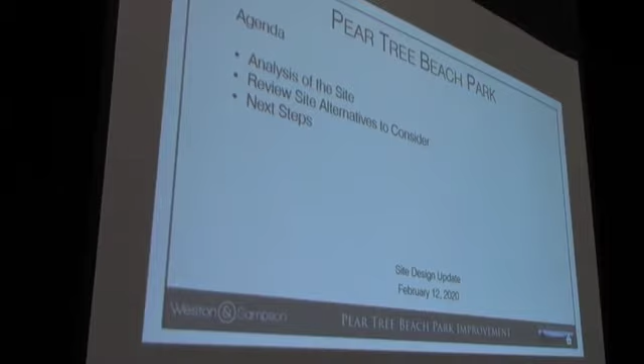Good evening, everyone. Quickly, for tonight's agenda, I'm going to go through the analysis of the site. I will give Craig and Devin a chance to introduce themselves and give a little background on who they are. We'll review some technical data tonight about the grades of the parking area, looking at some actual flooding events and projections. I'm going to review the CAM report outline, what that entails, and go through what the next steps for the committee need to decide as the meetings progress. But first, I want to reiterate some of the priorities and key considerations we've been working through in this whole process, which come out of the RFP that was the basis for this project.

The first, and these are in no particular order, is to protect views and maintain the natural qualities of the beach park area. Second, provide sidewalks and pedestrian access through the beach park area. Third, improve beach resiliency and reduce wind and water erosion by increasing natural shoreline areas.

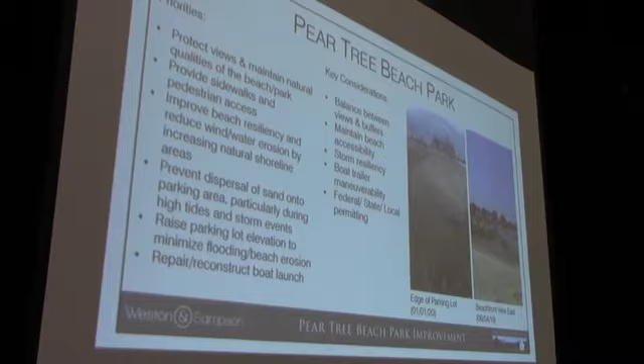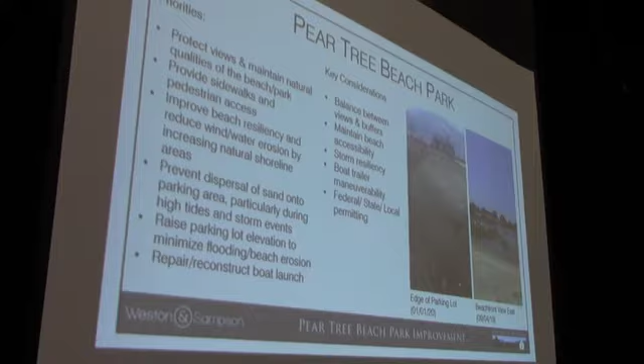As you know, there's a lot of sand that has been built up, specifically during storm events, that has eroded or washed over into the parking area. This next goal is to prevent the dispersal of sand onto the parking area, particularly during high tides and storm events. Next, to raise the parking lot elevation to minimize flooding and beach erosion. And third, to repair and reconstruct the boat launch.

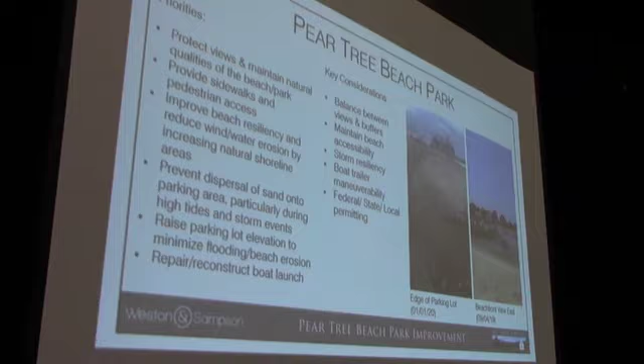So these are really the basis for a lot of the site work we're talking about tonight. Neil's been talking about the building so far, so we're going to pause on that component of the project. But everything we'll be showing you actually works very seamlessly together. The grades we'll be talking about, everything Neil's been working on, works with everything you're seeing tonight. So it all works as one complete puzzle piece together.

Key considerations to accomplish these priorities: the first is the balance between views and buffers. We've talked about this a lot in the past, just balancing that need to buffer the resource areas while also preserving the views that are into and out of the park space.

We want to maintain beach accessibility, so when looking at where the parking area is and how to get to the beach areas, we maintain that access and connectivity between the beach area, the parking lot, and the concession building. We want resilient plans, so when storms come or projected sea level rise happens, we have a plan that's going to last for years to come. Not that we've addressed it this year, and then next year, with whatever event happens, you're in the same position as this year. So really looking forward, we're projecting out and having a plan that's really going to be resilient for years to come.

Related to the boat launch, we're looking at trailer maneuverability, so access around the parking area, making sure we are maintaining parking as well as circulation patterns so that users are comfortable using this space and it is a functioning parking lot. And finally, getting through permitting - state, local, and federal permitting process - abiding by all rules and regulations, making sure we're going through proper channels for state and local permitting. That's just an underlying key consideration in everything we're talking about - we have that requirement we're going to have to follow through with, and that's in the best interest of the town.

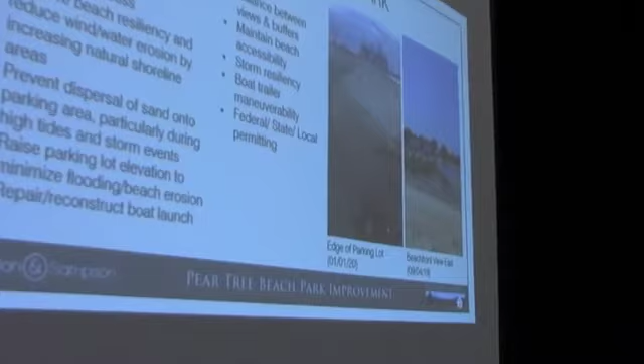Really quickly on the pictures on the right-hand side, just for perspective - sorry it's a little grainy - the view on the right, many can see, this is looking out more or less from the concession building towards the harbor area. And although it doesn't look nice, this is actually a wetland area. You can see when the water's at low tide, just how different it is in that low water event. And the picture here, I think Craig took maybe just after the first of the year. This is a similar view - the curb line is actually right here, and the water had washed up into the parking lot.

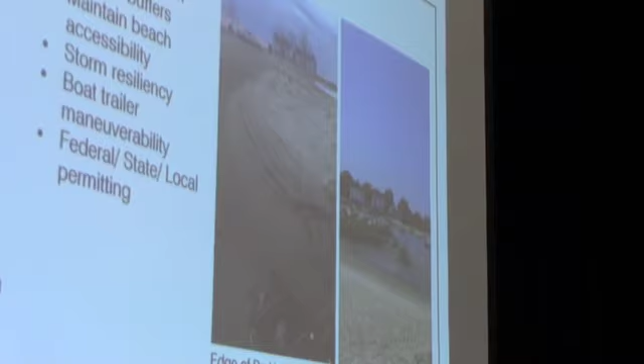So although you can't see the asphalt, it's under there. But those are two kind of balancing points - we're taking this low water and high water event, and a lot of discussion we'll have tonight will be on those two components. So really quickly, I want to let Craig and Devin give you a little introduction to who they are, besides what Neil said.

My name? That's your name? Yeah, you know me, hello.

My name is Craig Flaherty. I'm a professional engineer licensed in the state of Connecticut. I am the president and senior engineer of Redniss & Mead, a land use consulting company based in Stamford, providing land surveying, site civil engineering, and zoning consulting services. My background includes 25 years of providing land use consulting services, site design, and site engineering with a specific emphasis on stormwater and floodplain management, predominantly in Fairfield County. I've worked a lot in town - for Noroton Yacht Club, Noroton Presbyterian Church, the Anderson Memorial Trust, Woodway Country Club, and also on one of the two Grove Heights projects - for familiarity with local regulations as well.

I have served on a number of boards and committees in the town of Darien. Two past ones were the Environmental Protection Commission, which in the town of Darien is the Conservation Commission, the Wetlands Agency, and the Flood Erosion Control Board. I served on a flood mitigation strategy committee that reported directly to the selectmen, which dealt at the time mostly with riverine flooding after some of the floods the town experienced in 2007 and 2008.

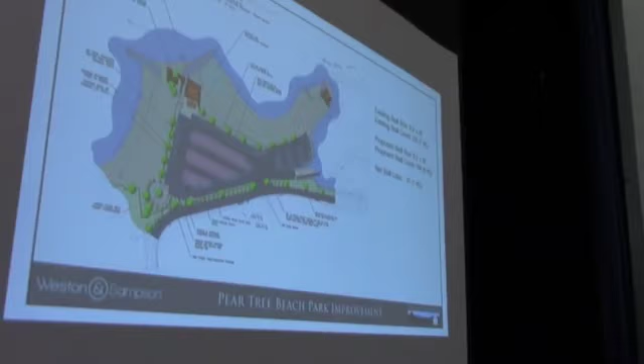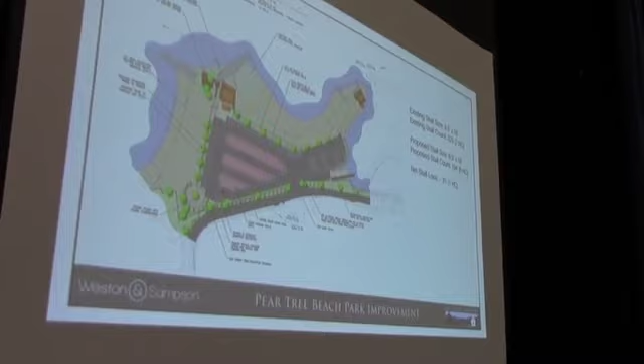I think this might have been back in September. Actually, time has kind of flown. We've gone through many iterations, but the latest, just very quickly, was looking at the parking lot more or less as it stands today, replacing the existing boat launch. We had a previous discussion about berms. At that time, the berms were set aside for a later date. So there was a landscape patch, or landscape areas, buffering between the parking lot and the beach itself with trees.

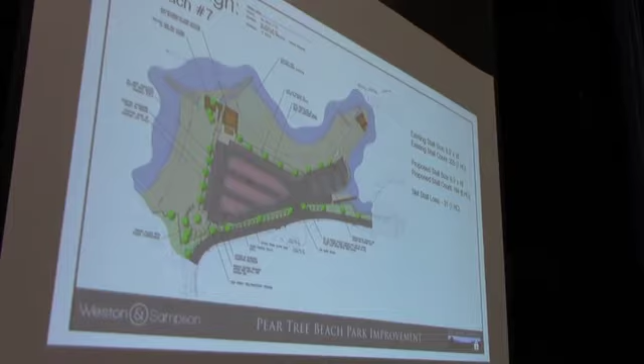The concession building, as I mentioned, has been evolving and progressing. There's a seating area down in the lower left-hand corner, an outdoor plaza, picnic table area with a mixture of different surfaces. Overall, we're looking at basically the parking lot as it is, but with a reduction in parking spaces. We noted earlier this line is the existing edge of pavement, and we had pulled that edge in for the back of these stalls to give additional beach space.

So with this plan, this is really the template that we're going to move through a couple slides to get fairly technical into the hydrology of the site itself.

Just to reiterate some discussions we've had in the past, the features that go into the landscape: one of the major limits is the mean high water limit at 3.4, which wraps around the entire parcel. The coastal jurisdiction limit, fairly hard to see but maybe better on your mapping, is at elevation 5.5, and it cuts into the parcel itself right here. That is important because that is a limit that the state has jurisdiction over. So if you imagine this whole area here, that's where they do have a say, as in DEEP has a say, on what can go into that area.

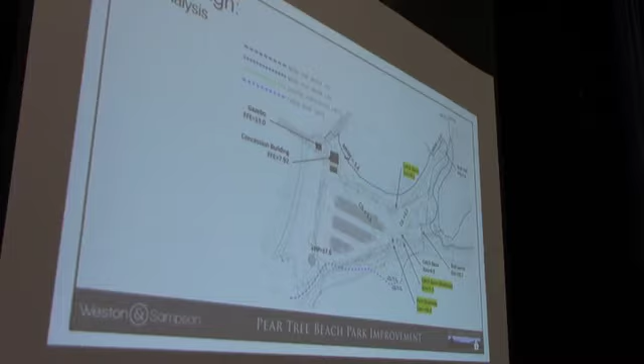The next line I want to point out has a couple of elevations, because you're going to see these points come up over and over. There is a catch basin here right at the edge of the parking lot. Make a mental note: that's elevation 4.2. So mean high water is 3.4, coastal jurisdiction is 5.5, and this is in the middle. Out here on the road, it may seem insignificant right now, but you'll see why it's important. The catch basin at the road is elevation 5.5, and the park drive at the driveway is about 5.9. I say that because these grades pretty much are the controlling grades that drive how this parcel, the park area, the parking lot area, really can be raised within reason or modified within reason.

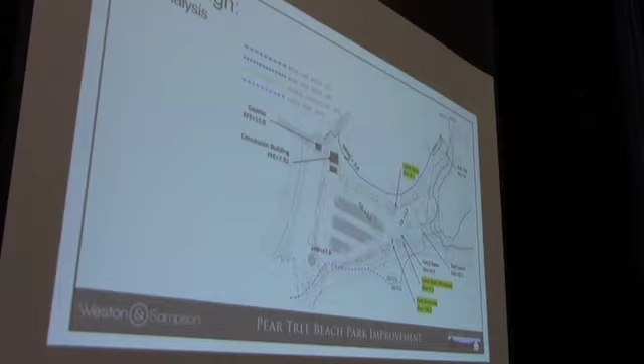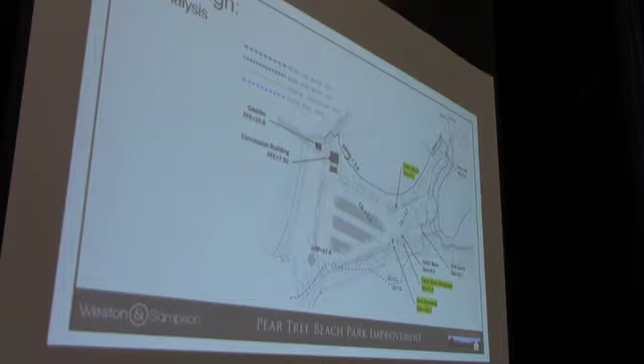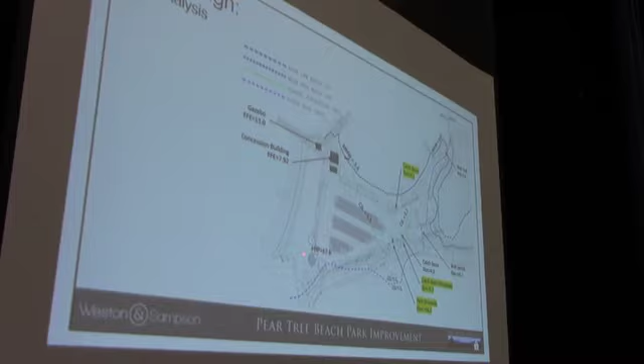And as we go through, you'll see these points still come up, so I kept them highlighted because they're important. Also note that the concession building is 7.92 and the boat club is at 7.9 - you'll see those elevations come up again for perspective. And finally, looking at the high point in this corner, about 7.6, that drops down to 4.2. So about 3 feet of elevation difference across the parking lot, but relatively it's pretty flat. You'll see in a minute how those grades influence our conversation.

May I ask a question? You're just on that slide. Can you clarify why you have FFE versus rim versus elevation as your levels?

Sure, sorry for the acronym. FFE is finished floor elevation - basically the surface of the walking surface of the buildings. Rim is actually the elevation at the rim of the catch basin, so the metal, the iron that sits in the storm drain, that is at the elevation of 4.2 or 5.9.

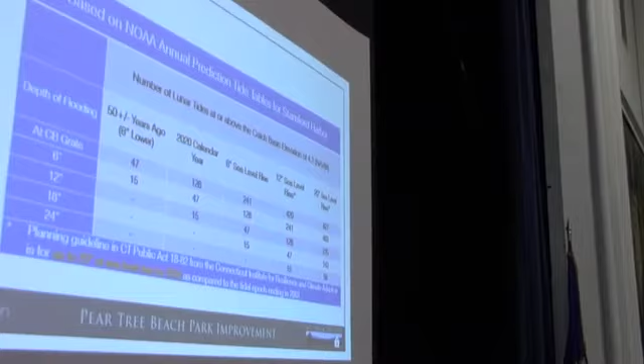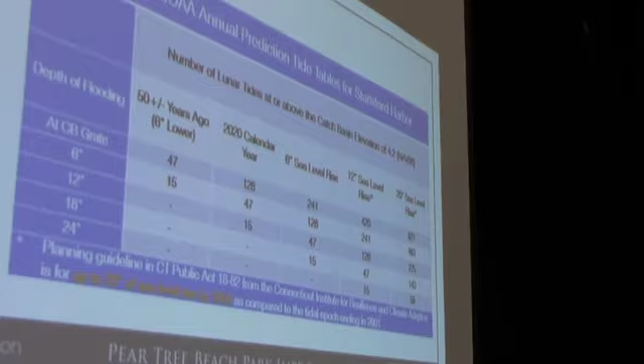Thank you. So as we're starting looking at the site and some data, Craig's going to talk a little bit about the prediction models - these are some of the values that are important as we look at the site. I'm also going to hand out a memo summarizing some of the things I might go over in my presentation tonight.

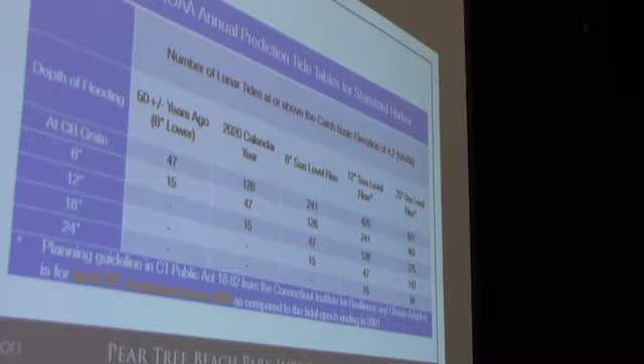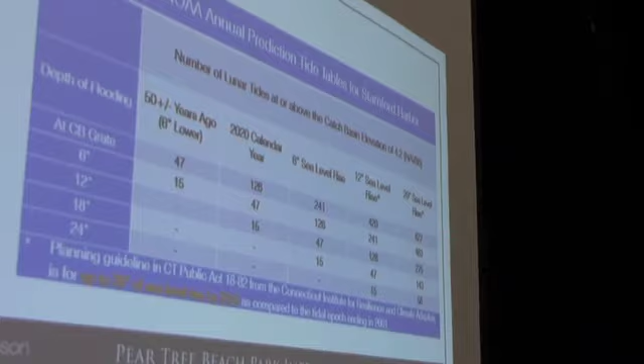First, a little bit about the numbers Dan was using. All those numbers are expressed in feet, above a particular datum, the 0 point, called the NAVD88 datum. It's accepted by FEMA and used in all their coastal and riverine floodplains. It's also accepted by DEEP in the state of Connecticut for site plan review applications in coastal or riverine flood areas. More importantly, it's the datum that your survey was based on, so as I talk about numbers tonight, they're all based on that same datum as your existing condition survey, and it has the regulatory framework.

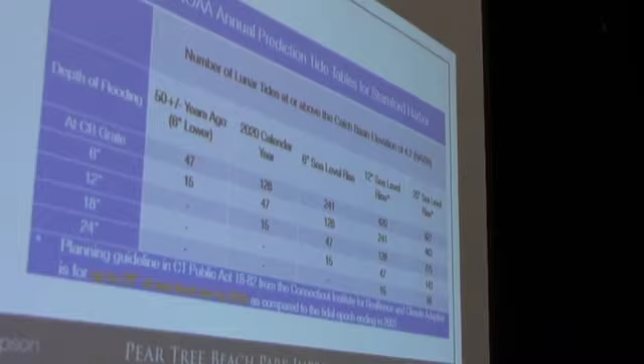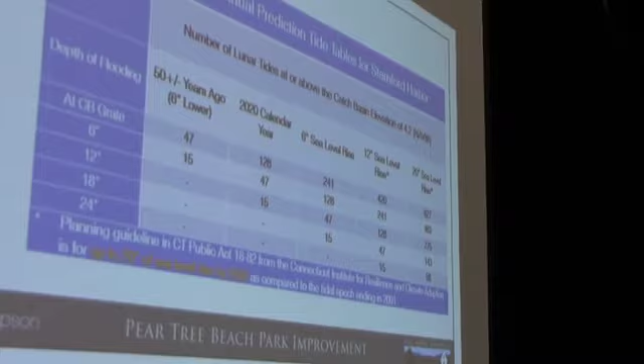This datum is different if you're a sailor or look at tide charts - that datum is usually based on mean low water, and could be several feet different. So when we say mean high water is 4.3 based on your survey, on a tide chart you pull off the internet it might say 7.3. So it's not the same thing - I just want to make sure that's clear.

The other thing to point out before I get into the numbers - I want to spend time making sure you understand the message I'm trying to convey - is in this memo I just passed out, the parking lot at Pear Tree Point Beach is low-lying. You know that, and that low-lying nature makes it susceptible to inundation during just a normal predicted lunar tide cycle. It makes it susceptible to inundation in any storm surges or weather events, and those conditions will be exacerbated moving forward based on predicted sea level rise.

Just as a frame of reference, the parking lot at Weed Beach is around elevation 8, plus or minus, based on the same datum. So when this catch basin is at 4.2 at the low point of the parking lot, that's 4 feet lower than the parking lot at Weed Beach. Most of this Pear Tree Point parking lot is below elevation 6, although it has high points near the picnic area, around or above 7, near the boat club at or around 7, and near the concession stand at around 7. It all rolls down to that lowest catch basin, so most of the parking lot's really below 6 - 2 to 4 feet below the Weed Beach parking lot, which is why this parking lot floods very frequently when Weed Beach really only floods in coastal storm events.

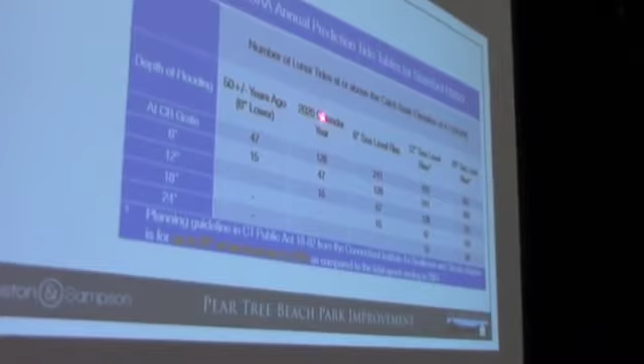So it's much more frequent than you might imagine, because it happens at night, it happens in winter when you're not there, but it's happening frequently. And where you pick up that number on this chart is here. All this data I'm presenting is based on NOAA annual tide prediction tables for Stamford Harbor.

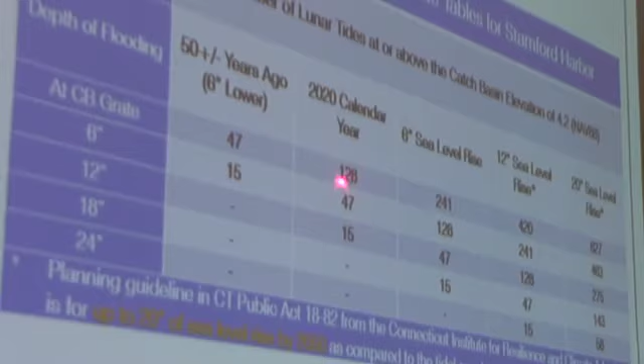This is predictions for the 2020 calendar year, so that's the column we're focused on right now. I'll get into the other columns as we move forward. The top row shows how many times in 2020 the elevation of normal tide—not storm surge, not sea level rise—is going to be at or above that catch basin grate.

And what we've done in this column on the left is say, okay, how much water is going to be in the parking lot as water rises and gets higher in some of the higher tides. So at the catch basin grate, we have 6 inches of ponding in the parking lot by the catch basin, 12 inches of ponding, et cetera.

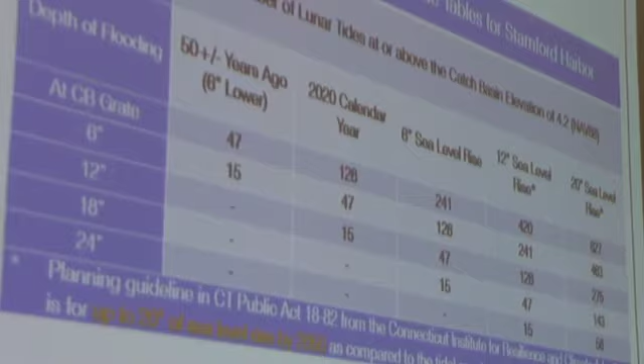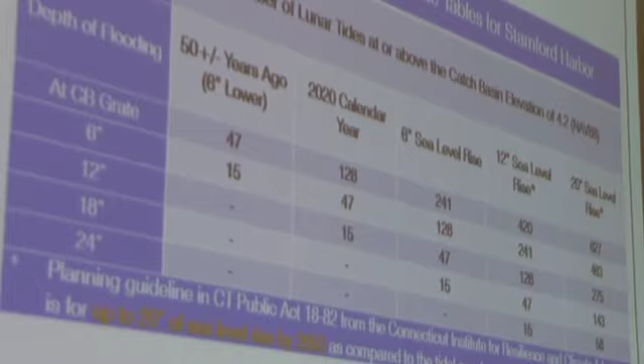So coming back to 2020, this coming year, something like 4 times a month there'll be at least 6 inches of water surrounding that catch basin, which starts to expand out into the parking lot. We're going to show you a graph of that. And something like once a month, there'll be at least 12 inches of water at that catch basin, pooling out even farther.

And this has nothing to do with storms. This is a beautiful sunny day. This is just normal predicted tides.

So before I go, I think the other thing to note is you remember Dan saying the coastal jurisdiction line was about elevation 5.5. When the DEEP sets the coastal jurisdiction line, it's actually a different elevation for different communities up and down Long Island Sound. They're replacing some old regulatory language, and they were basically trying to target the highest single annual predicted tide for any given year.

Again, not storm surge, not sea level rise, just predicted tide cycle based on the moon and the sun. That's at elevation 5.5, and that's what we found in our data too—that happens zero, one, or twice a year when you're looking at the predicted tides. So they did a good job picking that elevation.

The other thing that's unique about Long Island Sound, and folks that spend time out in the Sound understand, is the geometry of the Sound affects tides along the Sound. So high tides to the east are lower than they are in Darien, and high tides to the west are higher than they are in Darien.

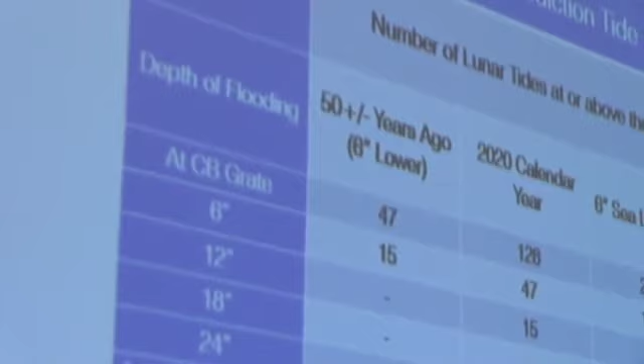We've seen about 6 inches of sea level rise over about 50 years. When I actually checked the tide gauge data from 1974 versus the tide gauge data for 2019, for the 45-year period, it was 7 inches. I used 6 inches for ease of math.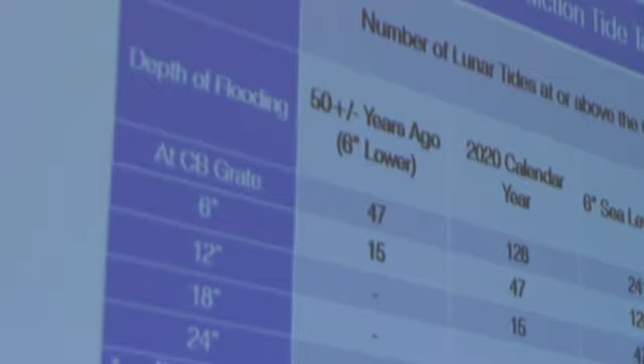But you can see that 50 years ago, which happened to be when the original bathhouse, the one that's currently there, was built, that 6-inch flood happened once a month. And now that 6-inch flood is happening 4 times a month. A 12-inch flood didn't happen, based on, again, not weather-related incidences, but just tides.

And now it's happening. So if you've ever looked at the graph of a tide cycle, it's a sine curve, and the top of the sine curve is very flat. So if you adjust the top of that sine curve, you actually experience a lot more frequent inundation and a lot longer inundation than just a linear analysis might otherwise suggest.

So we now take that information and start moving forward. What happens if we get another 6 inches of sea level rise from where we are today? Well, that 6-inch flood that 50 years ago was happening once a month, and now is happening 4 times a month, is going to happen 10 times a month.

That 12-inch flood that didn't used to happen, and is now happening once a month, is going to happen 4 times a month, et cetera, et cetera. So I think the point I want you to take away, and we can talk about the other numbers too, is that with very little sea level rise, the nuisance that might be tolerable today is going to turn into what may be an intolerable nuisance.

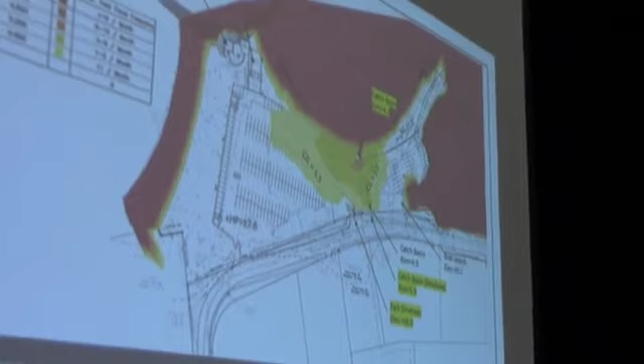So we tried to take the information from the chart and demonstrate it in plan view. The exhibit you're looking at is a study of existing conditions, existing survey, existing ground elevations, with this year's 2020 tide prediction and no storm surge, no sea level rise. The yellow area, the lightest yellow, is that plus or minus once-a-month event. The orange or red area centered around the catch basin is that 3 or 4 times a month event. As the water gets deeper, it spreads out in the parking lot, and you can see how much of the parking lot is being impacted by these events.

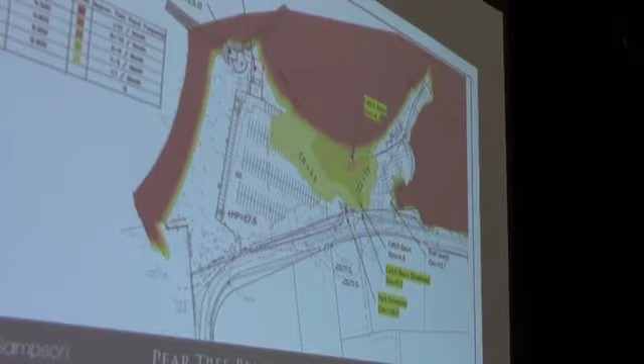So now we're going to take this and project it out. This looks at the same scenario, existing conditions, but with 12 inches of sea level rise. How does that change? You saw the numbers on frequency, well this is how it changes how much of the site gets covered with water. That red area is kind of hard to see with those blurry numbers, but I think that's the area that's something like 18 inches deep in the highest floods.

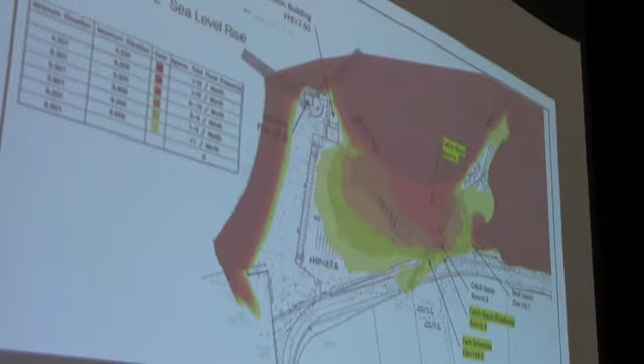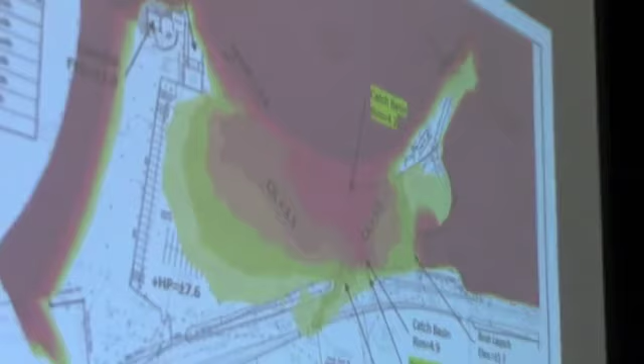Going out from there, let's go back to the chart to make sure I've got this right. This is the extent of flooding when water gets about 12 inches deep, and I think this is the extent of flooding when water gets about 18 inches deep.

Along with the frequencies noted in that table from the slide before, this is what a do-nothing scenario will get us at some point in the future as sea level rises. It significantly, in my opinion, affects the usability of the asset.

Moving on from there, you'll see that at this point with the 12-inch sea level rise, there's actually inundation in the road. As I noted earlier, this is about elevation 6.0. So in this scenario, the parking lot is flooded, but also part of the road would receive some of that water because it's above 5.9, which would be a source, and it's also coming from the lower area of the parking lot. Just make note of seeing this little finger here, you'll see that continue.

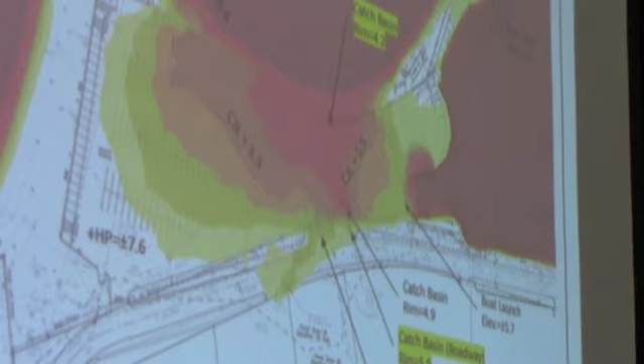The extent is that once a year event, right? The single highest predicted tide, that's the farthest out yellow. It's going to happen once based on predicted tides. But as you get closer to that catch basin, those are the events that are going to happen with much greater frequency.

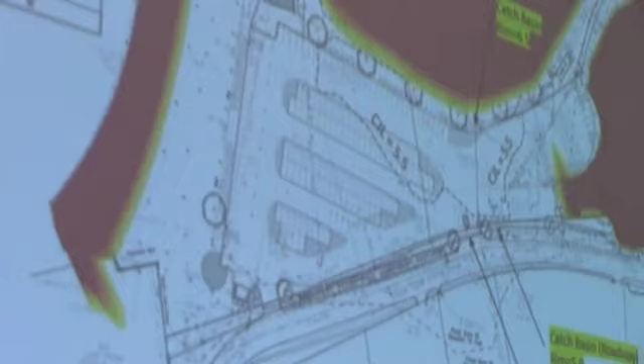So in concept, the grading plans that Weston and Sampson is looking at and we're reviewing are going to try to eliminate any flooding in the parking lot and provide more elevated beach along West Beach that's more usable more frequently.

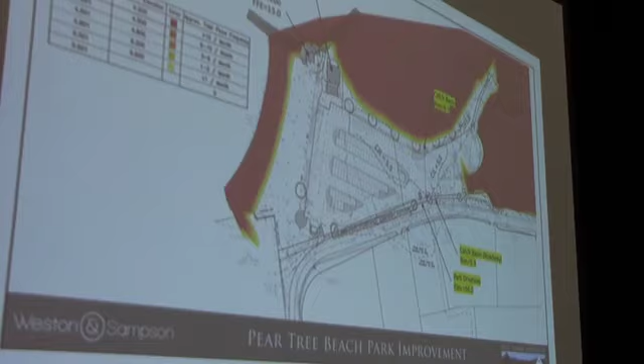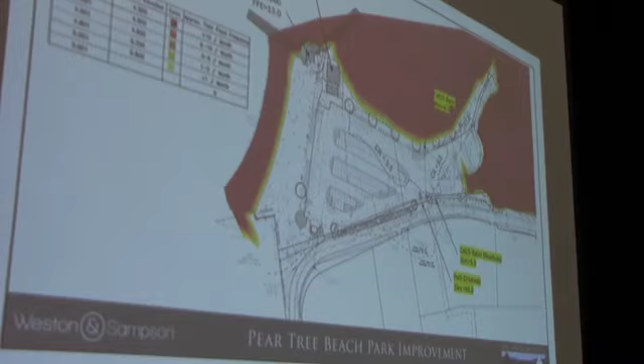And so this is that baseline 2020 year with zero sea level rise. After we make improvements, what are you going to get? You're going to get more width on West Beach, and you're going to get a dry parking lot in these predicted timelines. In this case, the improvements are raising the elevation of the parking lot where we're talking about.

So that rim earlier was at a 4.2. By raising it to 6.5, you see that there's no source of water coming out of that point anymore because it's now above these elevations we're talking about. It creates a higher and drier area as a result.

And then to stress test this: if you go through the process of spending the money necessary and doing the permitting necessary to accomplish that, what happens with 12 inches of sea level rise?

So it's still the infrequent once-a-year events in the lightest yellow versus once-a-month events in the slightly more orange, happening, but not at the same frequency as they do.

And to note in this scenario here, there is some flooding in the parking area, as obvious. I pointed that finger here across the road. This is because the rim of the catch basin in the road is a source for that flooding. So at this point, you would not be able to get to the park because the road would have flooding. The parking lot would have that 1-in-a-month occurrence of flooding there.

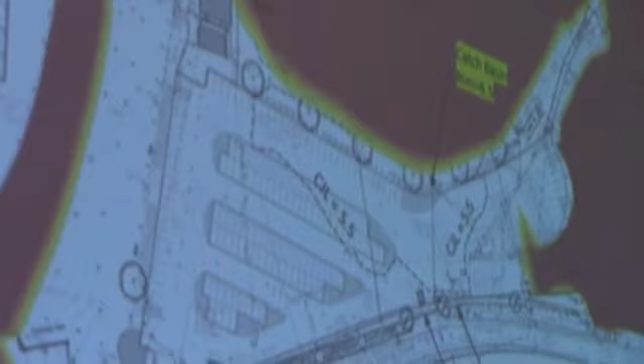But you're adding 18 feet of depth to the beach. That's correct, adding 18 feet of additional beach area. So you're swapping beach for parking lot. Correct.

Or the other way around. Now, I recall an early meeting, I'm just asking these questions, with Jeremy, and he said that raising the parking lot elevation was really difficult to get approved by DEEP. And he also indicated that when you raise the elevation of a parking lot in one area, you may have consequences from adjacent land. I'm just asking these questions.

So we're going to cover a little about what these scenarios mean from a permitting standpoint, an approval standpoint, and Devin can probably speak a little about too, the area of this parking lot relative to Greater Long Island Sound.

It's typically reviewed as a small droplet in the entire body of water, but I'll let him speak to that. We will cover a little about the permitting processes. Each of these scenarios has a different path we would have to head down, depending on the decision of the committee.

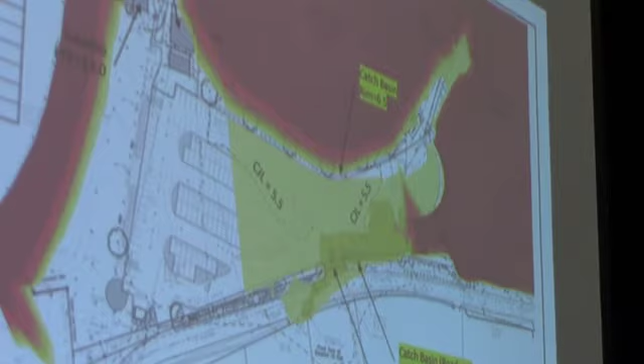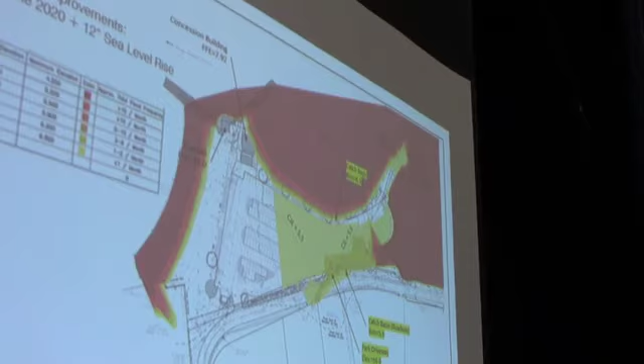So we covered a little about 12-inch sea level rise of a proposed improvement condition. Just to note, you can see here where it's dry. From a modeling standpoint, that would be top of curb, basically water never exceeds the 7.0 contour elevation, which is why you're seeing this sliver of white of never having water exceed over that curb line. Again, you don't have any grading plans necessarily done at this point. We're just trying to show the rapid modeling of how these scenarios relate to existing and potentially proposed conditions of this park area.

So the water's coming out of the catch basin? What's coming down here? It's coming out of the catch basin. Yes, because we're not intending on changing the road. Or up the boat ramp. Yeah, or coming up there.

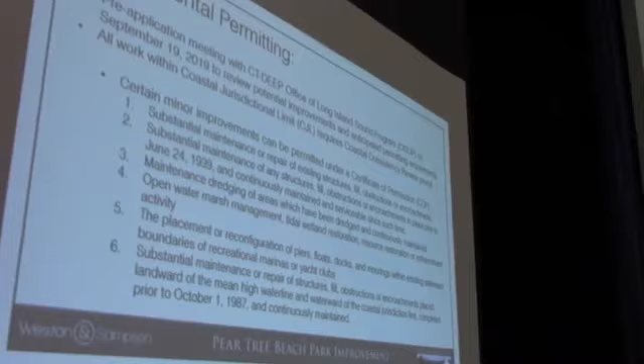So the permitting idea, Martha, you jumped ahead a little bit, but I mentioned earlier that we do have to go through the permitting process. Last year, we met with DEEP to have a pre-application meeting to basically review at that time all the improvements we're proposing within this project. We went down the list one by one of the potential permit pathway.

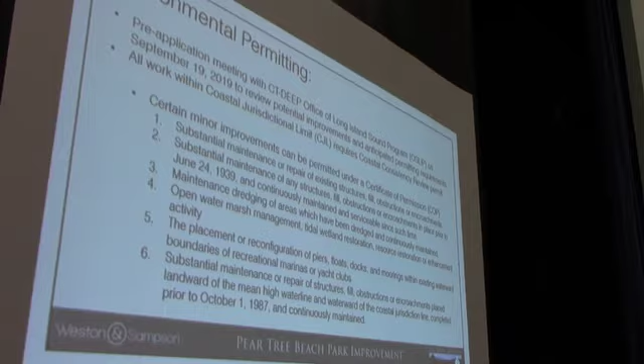And I noted earlier that the coastal jurisdiction limit is in their purview. We would go through planning zoning for proper review as well, and they actually need to defer some to the state for reviews. That's pending the planning zoning department.

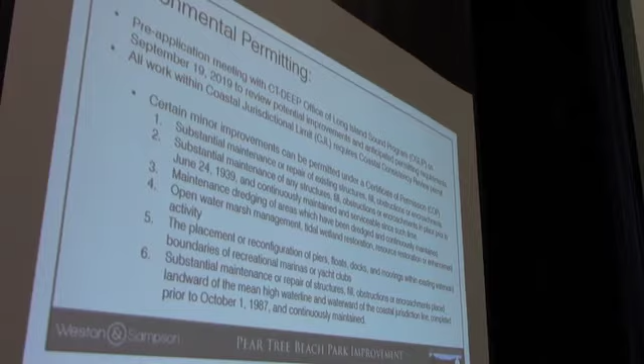But certain improvements would fall under the certificate of permission, and I covered this in one of our previous meetings. I wanted to frame that the certificate of permission really is a permit that's issued for minor improvements. You can see here the list 1 through 6, and this is a summary of their entire list. But you can see there's a thread that's continuous: substantial maintenance or repair of existing structures, or fill, obstructions or encroachments.

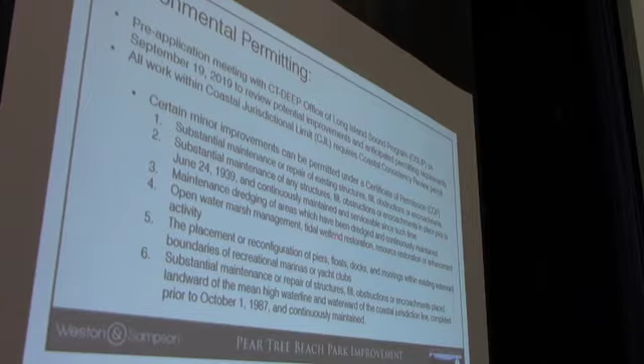Substantial maintenance of any structures in place prior to 1939. Maintenance of dredging, open water marsh management, tidal restoration, resource restoration, enhancement activities. Placement or reconfiguration of piers, floats, docks, moorings. Substantial maintenance or repair of structures.

So there was an idea that the COP is more from a review for minor improvements, more on the realm of a maintenance standpoint. So if we do exceed, through the state's eyes, that our improvements are beyond these, it's going to trip into an individual permit. It's beyond the COP kind of framework for the intent of that permit.

So we'll get here in a minute about how what we've shown you so far fits into those different scenarios. But most improvements proposed within this project do fall within a COP. For example, the dredging would be a COP. Working with building elevations and having improvements within the coastal jurisdiction limit, FEMA requirements, would be a COP.

The wetland restoration would be a COP. So really the item currently that would not fall within COP would be how much fill, that you were alluding to earlier, would be allowed within the parking area, which would prompt the need for an individual permit for those improvements.

Parallel to all this, we've been working on the coastal area management report. This is a requirement of the zoning regulations and the Coastal Area Management Act. This document, as you see on the screen in this quick outline, basically introduces the project and talks a little about the background of what has happened to the site prior to now.

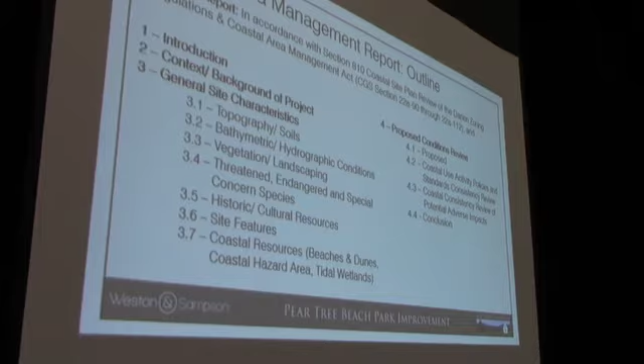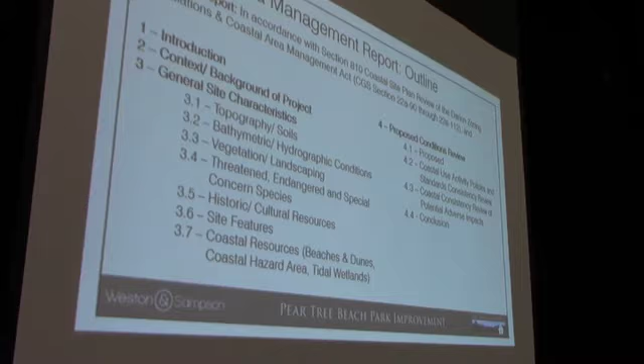It goes into general site characteristics, more from a scientific perspective of all these features: the topography, the bathymetric, hydrologic, and hydrographic conditions, vegetation, landscaping, threatened and endangered species or species of special concern, historic cultural resources, site features, and other coastal resources, whether beaches, dunes, coastal hazard area, and tidal wetlands. These are basically what's in the state statute for the policy we need to comply with.

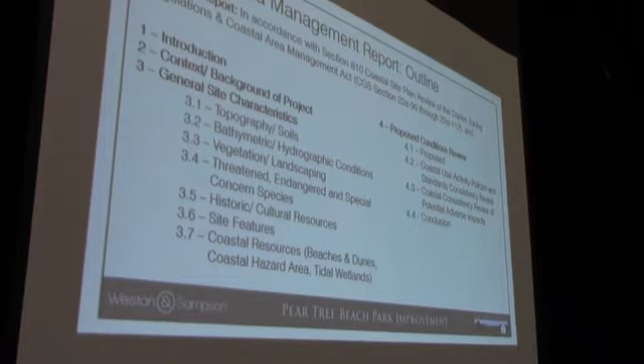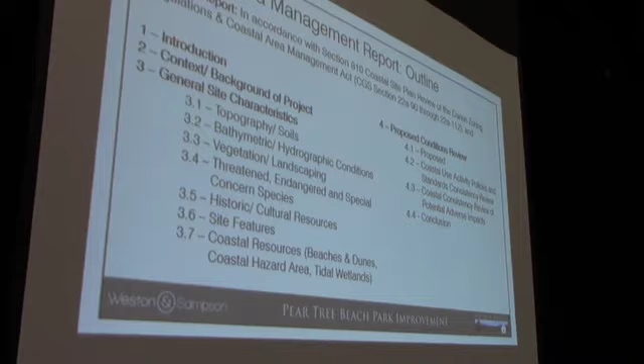So we review all these resources together, and then compare them to what the proposed conditions are. The section on the right is the piece that's not complete, that we're working on, because that all comes out of our conversation here of what the proposed improvements are that will go into this report. Once this is complete, this is part of the package that goes to plan zoning for their approval and review.

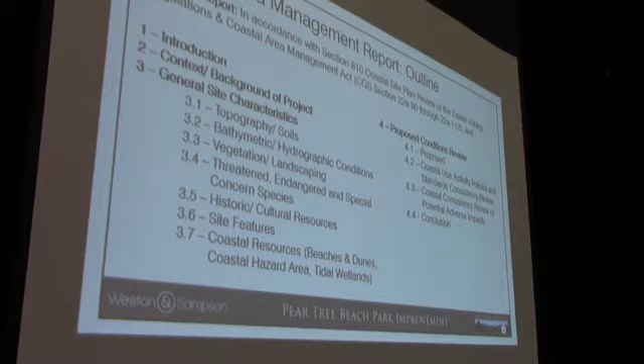And they may push it to have a parallel review, but that's pretty much up to Planning and Zoning's decision. The proposed conditions section will go through every improvement we're making and compare it to the policies, whether it's consistent or not with the policy at the state level, which is within the Coastal Area Management Act.

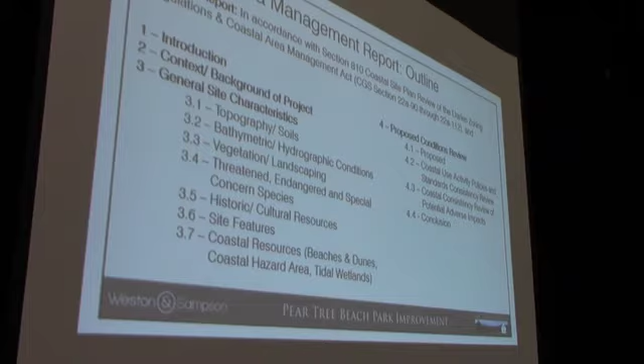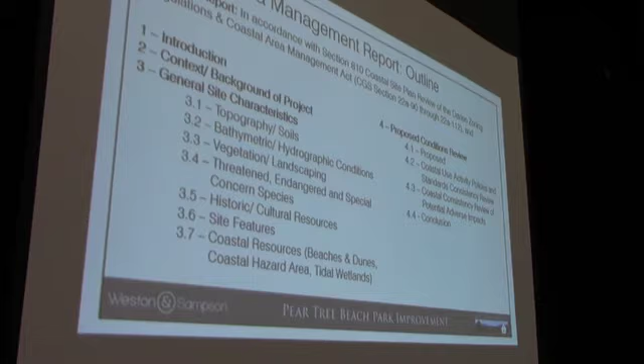Is there any potential adverse impact to any improvements we're making within the site? So we compare every single improvement proposed within the project area to the policies, and does it have adverse impacts? If so, how are we mitigating those, how are we improving the site to relieve them? Or are there no adverse impacts at all, and the project is within compliance with policies and regulations?

So that's what's happening next. Once we decide where the overall site is headed, we then work on chapter 4. There's a lot to take in, but we try to digest it down to roughly four alternatives that we want you all to think about as we move forward.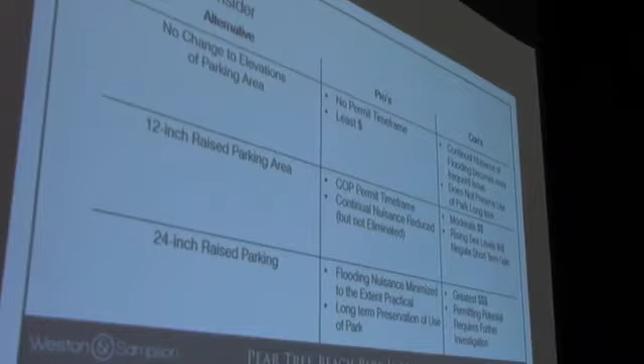The first alternative is no change to the elevation of the parking area. The benefit is there isn't a long permitting timeline. Any improvements without making changes would fall under a COP, about a 90-day review, so that's a streamlined approval because we're basically in compliance. It's the least investment into the parking area.

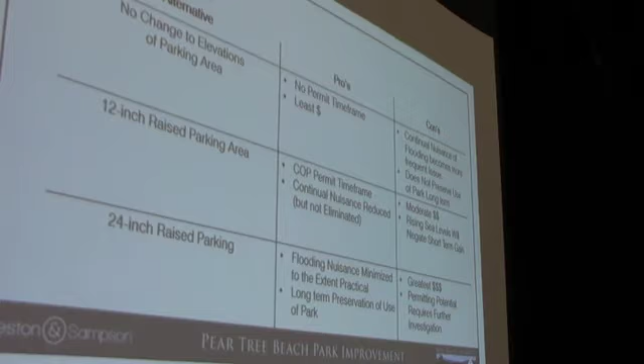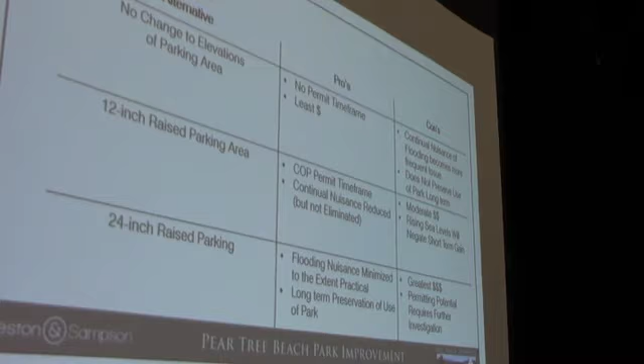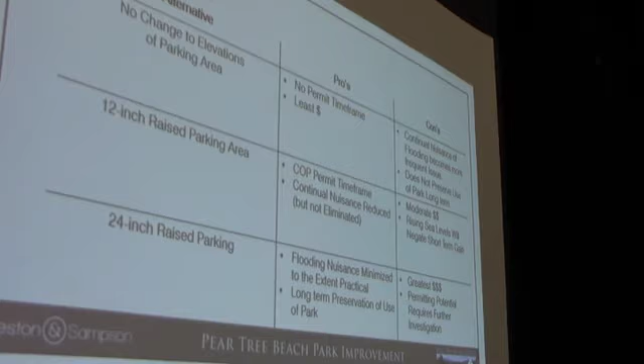But the negatives, as you saw from the imagery, are that the nuisance around the catch basin is now more frequent and more intense, with deeper water ponding. It's not just nuisance anymore, it's going to be a bathtub in the parking lot anytime there's rain. This does not preserve the long-term use of the parking area or the park itself—we'd have a water body within the parking area, which isn't the original intent. So we're not really preserving anything through this alternative.

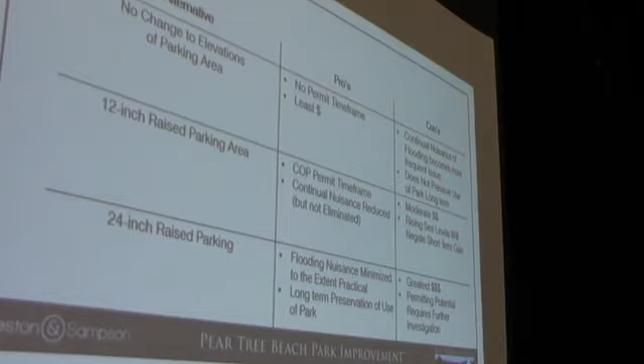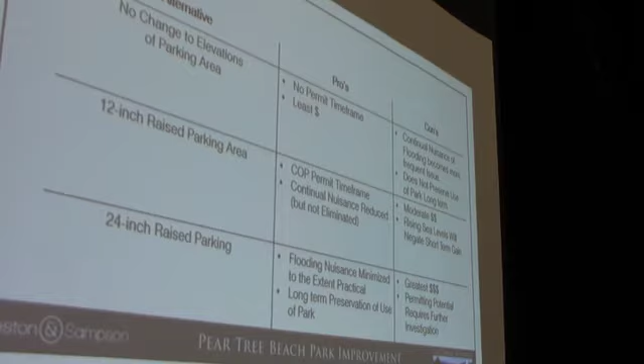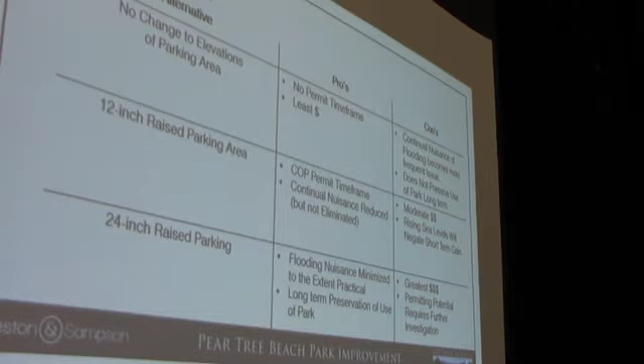The next scenario is raising the parking area 12 inches. That threshold is really an unwritten rule by DEEP as to what falls within COP versus what doesn't. If we raise the parking area 12 inches, it would fall within the COP permit timeline of about 90 days. The continual nuisance is reduced, but not removed—it's just reduced in terms of frequency and depth of inundation. The negative is that there's a moderate cost associated with this.

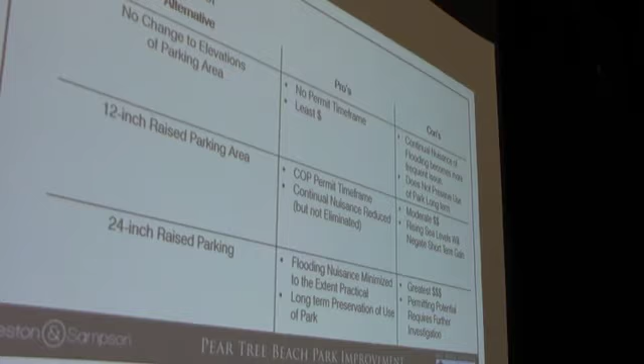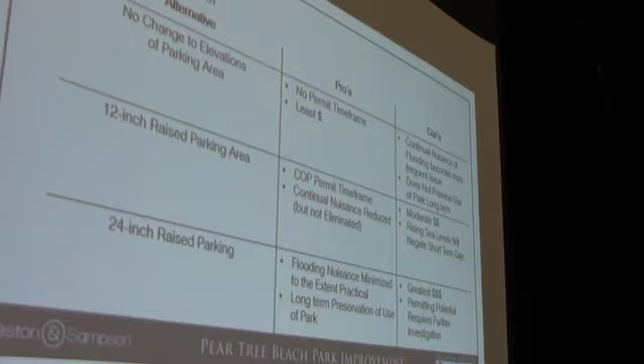There is going to be some investment—more than no change, but less than the next option I'll show you. As sea levels rise, or tides change, the short-term gain may not be such a long-term solution. This scenario may keep things high and dry for a couple of years, but in time it may see more inundation as tide and sea level rise continue.

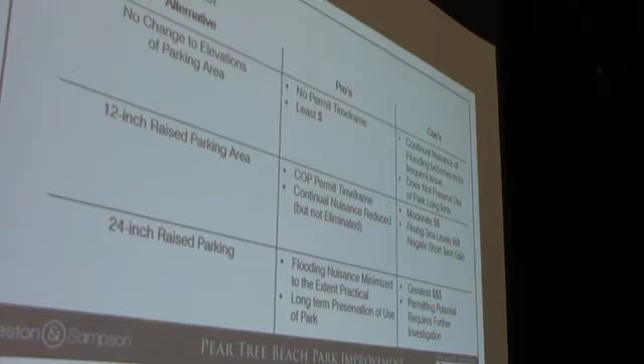So the last option is probably the highest end of potential improvements to the parking area. The benefit is that flooding nuisance is minimized to the extent practical. I mentioned there might be some flooding on the road—this would basically be in line with when the road floods. You may have some flooding in the parking lot, but the road stays dry, or the parking stays dry, so you're trying to keep them in sync so you always have a way into the park, instead of it being high and dry while everything around floods.

This would be a long-term preservation use of the park and parking lot area, preserving the park for its original intent. The downside is this would likely cost the most money, and permitting would go beyond a COP, likely requiring an individual permit—so a longer time and larger investment from a permitting standpoint. There are a lot of factors beyond this, but we tried to digest it down to something palatable for consideration.

That's really what we are looking to cover tonight. It was a lot to digest from Craig's analysis, but any questions?

Yeah, I think it makes sense to open it up. Just to cross the T though, to Marcus' question—your take is that we can go up to 12 inches under COP? Yes, we have concurred with DEEP that we can have a 12-inch fill within the coastal jurisdiction limit that would fall under COP.

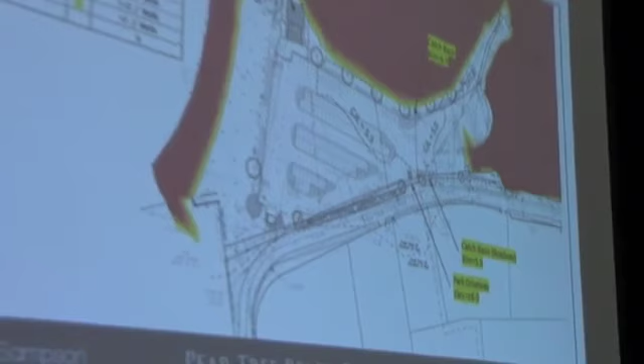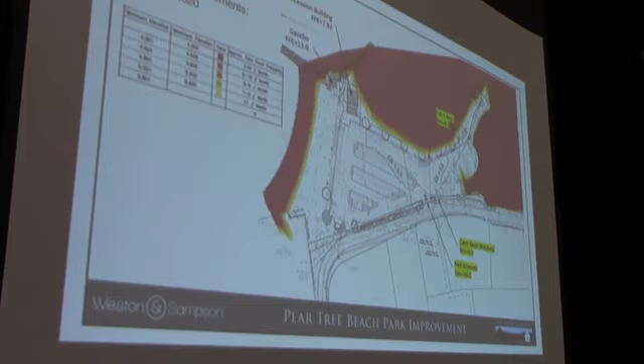The existing rim is 4.2. This rim is proposed at 6.5. So what's that, 2.3? Yeah, so that's at that little spot. If you go a little further over here, it might be a little less on each side, so plus and minus for simple math. This is the 24-inch, 2-foot average scenario, probably.

What would a 12-inch image look like? It might look like the plus-12-inch sea rise model a little bit - that's a 12-inch sea rise. But if it was just 12 inches of fill with no sea level rise, it's about the same as 24 inches of fill plus 12 inches of sea rise. Okay, so we could use that roughly for your middle scenario.

I'm trying to match the images, the mapping, to the 3 scenarios you've provided. And as Dan points out, these are highly schematic at this point because we don't have a real proposed grading plan we're working with yet. But just to match this image to these scenarios - yes, that would be about it, area flooding would be consistent with that. Yes, that's the 12-inch scenario. Okay, thank you.

It's difficult to see on this, up on the screen, but the little areas with the dots along the curb - what does that signify? I think those are previous areas of vegetation. So these were representing trees, and the rest shrubs or vegetation beneath the trees.

As we go away to think about this - it's really helpful and very informative - what are you suggesting we should be kind of mobilizing in terms of considerations, to come to some understanding of what direction we're going in here? So what would be next steps here? Of course you'd be asking us to come back and give you a sense of what we think about this. My take would be we'll come back - we've got another meeting coming up in a couple of weeks, and allow people to think about this a little bit, rather than jump into recommendations or thoughts this evening.